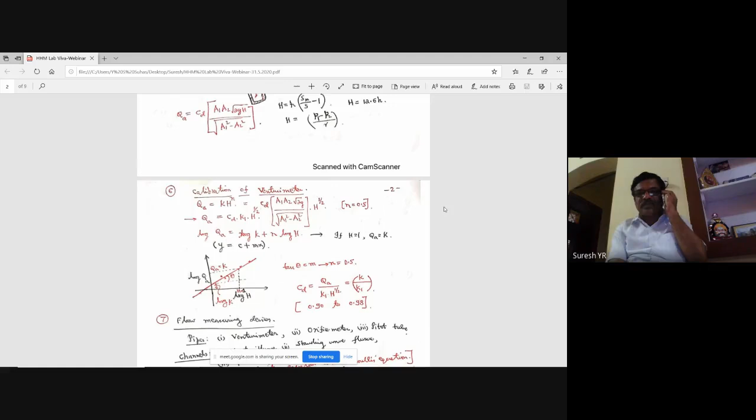I think HOD sir has actually spoken to the students. Okay. Students, now we will be having Suresh sir taking over the screen. I'll join at the end, okay, because of some technical issue there's one-way communication, so please be silent. Yes sir, thank you sir. Thank you sir. Suresh sir, you can start sir.

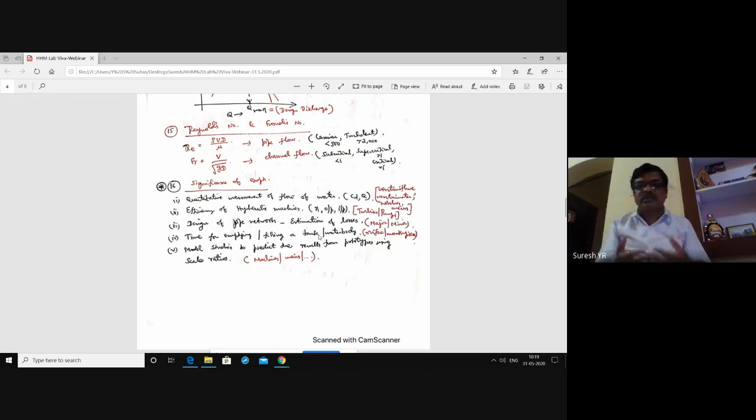Next, model studies. As I already told, to predict the results from the prototypes, we need to have all these model studies. Whatever experiments you are going to conduct in the lab, they are all model studies, because prototypes are all very big. Weir, notch, turbines, pumps, they are all huge in size. The actual structures are prototypes. Since we cannot conduct experiments directly on the prototypes, model studies are considered, using scale ratios. That is very important.

You have learned in model studies about different scale ratios using Reynolds model law and Froude's model law. Mainly those two laws are very important for civil engineers because water is involved. For civil engineers, the main fluid involved is water. We are not worried about gases or other things, which mechanical engineers are worried about. By knowing the results from the model tests, we can always predict the behavior of the prototypes.

So this is how I have given 5 points why this lab is very, very important. You have a lot of points; I am just going to brief it. Now let us discuss one by one. I have made some 24, 25 questions from all the topics. First question, what is a fluid? The difference between a solid and a fluid. You should know about the concept of fluid.

Any substance which can flow is a fluid. That is a very simple definition of a fluid. Solids cannot flow. Solids can only be moved from one point to another point, whereas fluids can flow. That is the basic important difference between a solid and a fluid. That is due to viscosity. A very, very important property of a fluid is viscosity. Other properties will be there for solids also.

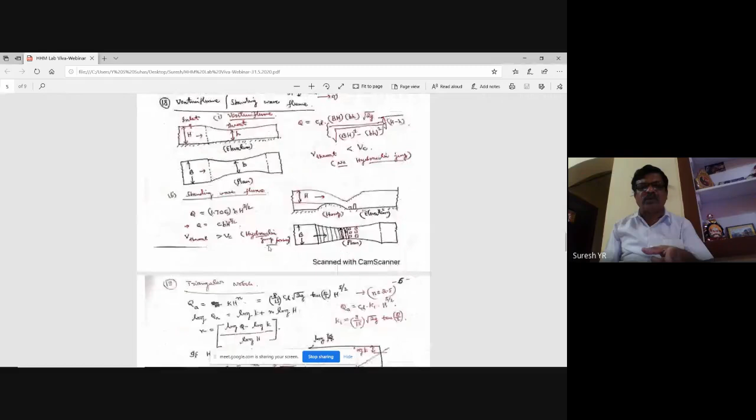Specific weight, gamma, 9810 Newton per meter cube. Then dynamic viscosity of water. Normally the value at 20 degrees centigrade is taken. Some books take 1 into 10 power minus 3, some books take 1.005 into 10 power minus 3. This is in Pascal second. Then kinematic viscosity, almost the same value into 10 power minus 6 meter square per second.

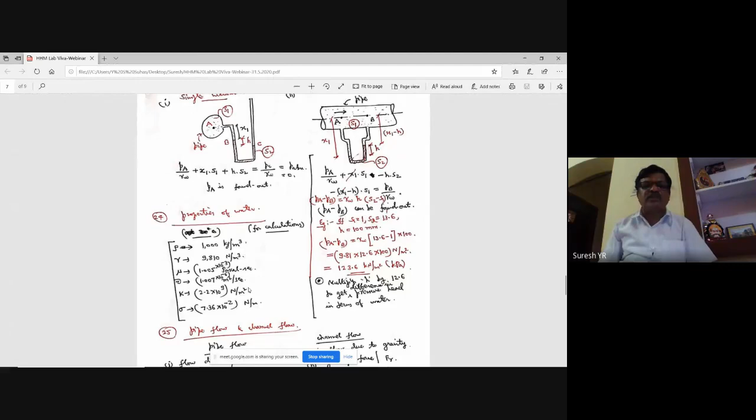Now coming to pressure, a very important concept in fluid mechanics. You have got two types of pressures: gauge pressure and absolute pressure. In question number 2, I am going to tell about that. You have a very important relation, P is equal to gamma H, the hydrostatic law. P is the pressure at any point in a static fluid. Gamma is the specific weight of the fluid. H is the vertical distance of that point from the free surface. That is P is equal to gamma H. This law is called the hydrostatic pressure law.

Using this, you can convert pressure intensity to pressure head. Here, please note that P is pressure intensity. Its unit is Newton per meter square or pascals. Gamma is specific weight, unit is Newton per meter cube. And H is pressure head.

So sometimes pressure is expressed in terms of meters of water, that is called as H. So if you want, H is P by gamma. This I explained in the last class when I told about turbines. Okay, so pressure can be expressed in two ways, one in pascals, another one in meters. So this is the relation.

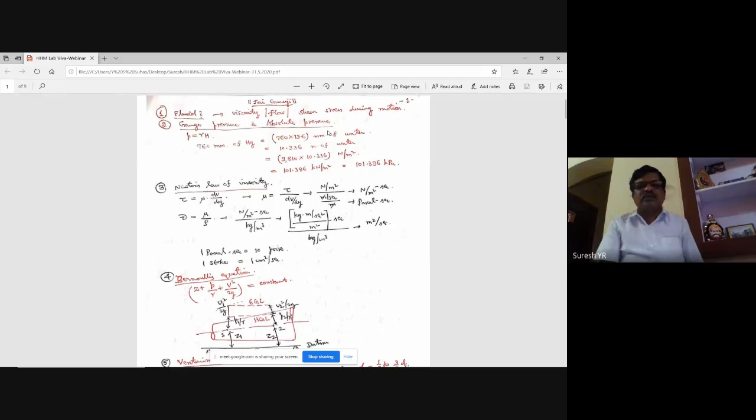Sometimes pressure may be positive, then it is called positive gauge pressure. Sometimes it may be negative, called vacuum pressure or suction pressure. That means if the pressure at a point is less than atmospheric pressure, it is called vacuum pressure. In the case of pumps, the pipe connected to the sump tank is called the suction pipe, because suction pressure, a negative pressure less than atmospheric, is exerted at the bottom of that pipe to suck water from the sump.

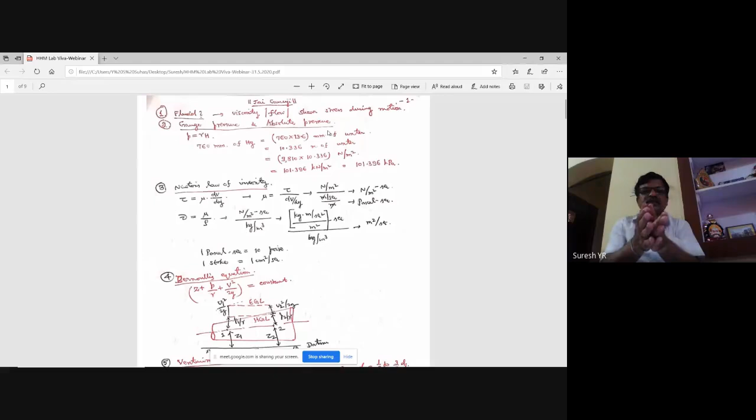Then the impeller will be there, and due to the centrifugal action of the impeller, the water will be forced to the delivery pipe, and then it is collected in the collecting tank or delivery tank. That is the procedure. So why I tell you this is, gauge pressure can be positive or negative. Positive means more than atmospheric pressure. Negative means less than atmospheric pressure.

Absolute pressure means it is referred with respect to zero as the datum. Absolute zero or complete vacuum is taken as the datum. So absolute pressure is always positive; it cannot be negative. That means pressure at a point can be negative gauge pressure or vacuum pressure, but the absolute pressure at that point is always positive, because it is measured with absolute zero as datum.

But one thing, keep in mind, whatever pressure we measure in the laboratory experiments, they are all gauge pressures. So please note that whether you are using a piezometer or a manometer, they are all gauge pressures.

Okay, so that's what I wanted to tell you. Next, very, very important. So in the case of fluid mechanics, we have three fundamental laws. So question number 8, basic laws of fluid mechanics. There are three important basic laws. One is law of conservation of mass, law of conservation of energy, law of conservation of momentum. So these three are the basic laws of fluid mechanics.

Very, very important. So using that law of conservation of mass, you can derive the continuity equation. So the one-dimensional continuity equation you have derived: Q is equal to A into V. Discharge is equal to area of flow multiplied by the velocity of flow. So that is the continuity equation.

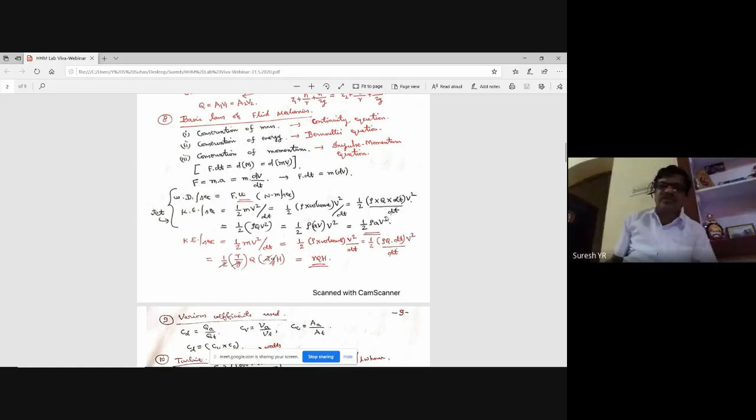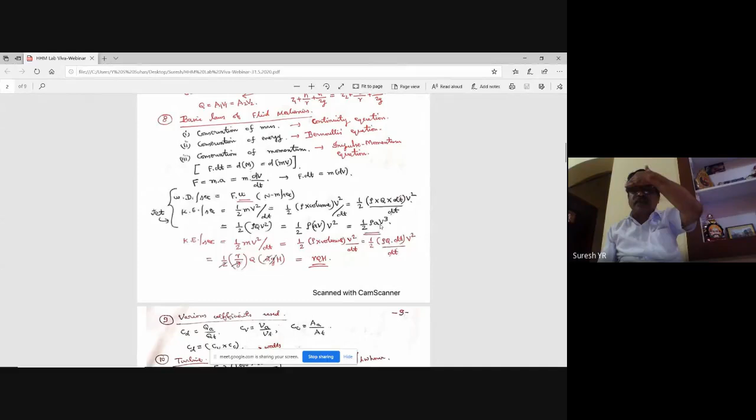So whenever we are finding efficiency of jet, this is your input. Whether it is a stationary vane or a moving vane, this is the input or the kinetic energy. But in the case of fixed vane, your output will be 0 because U will be 0. Vane will not be moving, so output will be 0. But in the case of moving vane, in the case of turbines and pumps, everything, so there, this is your kinetic energy per second, and this will be your work done per second. So the ratio of these two gives the efficiency. This is output, this is input.

Now in another form, I told on that day, whenever you are using a turbine, your gamma QH or kinetic energy is the input. So you can have like this also. Half mv square by dt, once again it is rho into volume, dt will get cancelled. This half will remain as it is. This rho can be written as gamma by g, because gamma is equal to rho into g, into Q, into this v square can be written as 2gh, because we know that v is equal to root 2gh. If you use Bernoulli's equation, neglecting losses, v square will be 2gh. So if you cancel out all this, you'll get gamma QH.

See how it can be derived. So we are going to use it directly as input in the formula. How we got it? This is the expression. Here gamma is the specific weight of water, 9,810. Q is the discharge in meter cube per second. H is the pressure head at the entrance of the turbine, which is measured using that pressure gauge in meters. So if you know this, then you can compute the input.

Why I told this is, these three are very, very important principles in fluid mechanics. Based on conservation of mass, continuity equation is derived. Based on energy conservation, Bernoulli's equation is derived. Based on momentum conservation, impulse momentum equation is derived. So these are the basic fundamental laws of fluid mechanics, which are used in one or the other experiments. So this is the Bernoulli's equation. This is what I explained there.

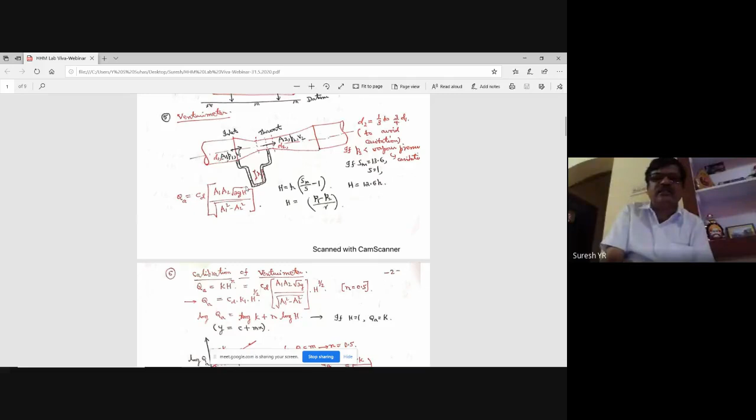Of course, if you connect the two sections to a U-tube manometer, definitely you will know at what point pressure is more. Actually, pressure is more at the inlet section. You can see here. Whatever liquid is there, it exerts more pressure at the inlet section. Therefore, it has gone down. So the difference in pressure is nothing but H. That value is H here.

Now, why is the pressure more at inlet? Why is the pressure less at throat? Why is the difference there? In the case of a Venturi-meter, the diameter is gradually reduced here. So this portion is called the converging cone. This is the throat section. This is the diverging cone. You have the values for the inclination and length, all those things, available in your manual.

So here, since the diameter is more, area at inlet will be more. When area is more, velocity is less. Please keep that in mind. When area of flow is more, velocity is less because discharge is constant. Q is equal to A into V. So when area is more, V should be less. So velocity is less here. When velocity is less, pressure should be more. Why? Because of Bernoulli's equation. This total is constant.

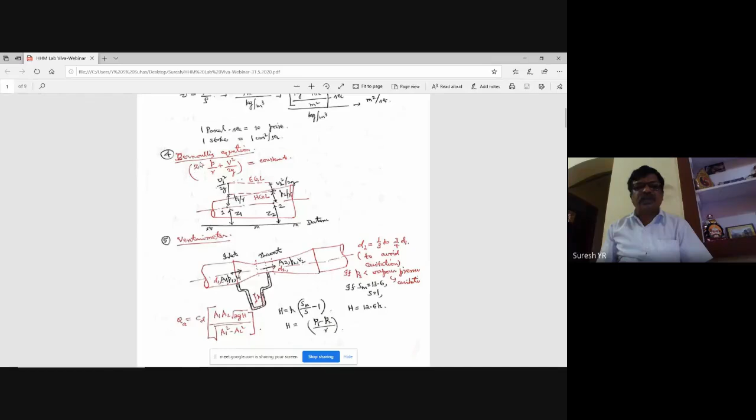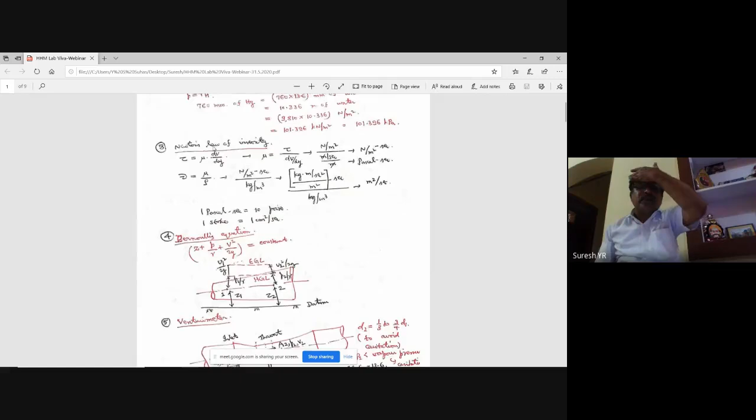When this total is constant, in the case of a horizontal Venturi-meter, Z1 and Z2 will be equal. You can cancel them out. So you will have P1 by gamma plus V1 square by 2g is equal to P2 by gamma plus V2 square by 2g. If you use that equation, if V1 is less, P1 should be more. So that is the concept. Velocity and pressure are inversely proportional here. That's why pressure is more here and less here.

And this is the equation we are going to use to compute the actual discharge in the case of a Venturi-meter. A1, A2 are the areas at inlet and throat section. H is called the Venturi head, which is given by this equation: h into Sm by S minus 1. Sm means specific gravity of the manometric liquid. Normally, mercury is used, so Sm will be 13.6, and S will be the specific gravity of the fluid flowing through the pipe. Normally it is water, so it is 1.

If you apply this equation, Sm is 13.6, S is 1. So 13.6 minus 1, 12.6 times h. That is why we multiply that value by 12.6. Whatever difference is there in the manometer reading should be multiplied by 12.6 to get the Venturi head H. Once you get that H value, by knowing the diameter, you can compute the area by pi d square by 4. So A1, A2 can be found out, and you can calculate the discharge.

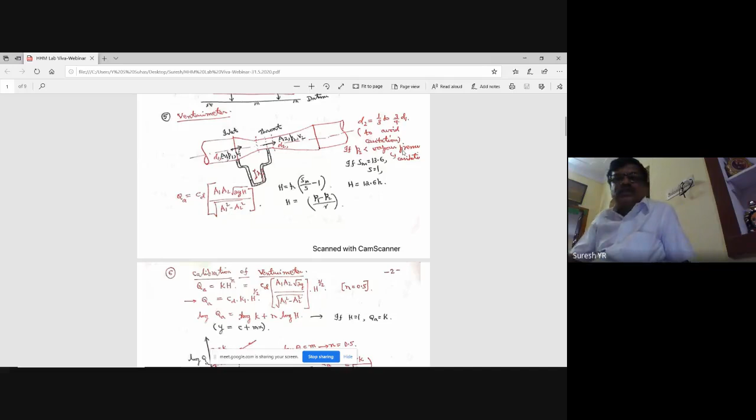Due to that, your discharge capacity will reduce and the efficiency of the machine will reduce. So the CD value will get reduced. To avoid all those things, we have to have a throat diameter between 1/3 to 3/4 times D1. Normally we take 50%, so D2 is taken as half of D1. So it lies in between these two.

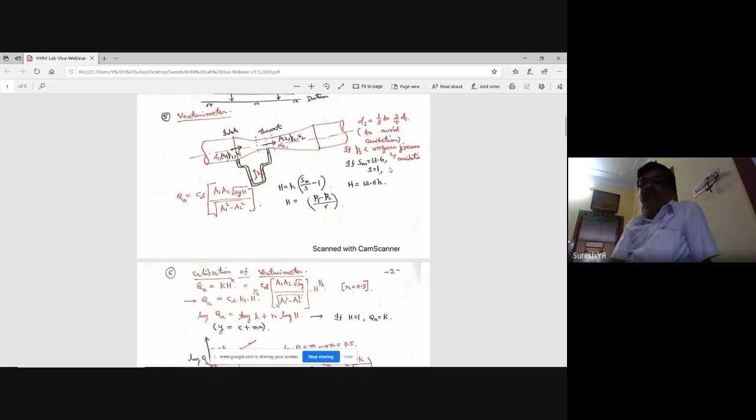1/3 means 0.33, 3/4 means 0.75, so we normally take 0.5. That's what you can observe in your laboratory: the ratio of the diameter of the throat and inlet. So that is the reason. Cavitation we have to avoid in any machine because it affects the efficiency of the machine, or when you calculate these coefficients you will get very, very low values.

Normally in the case of a venturimeter, the CD value lies between 0.9 and 0.98, so losses are less. When the value of the coefficient approaches 1, more than 0.9, we can say that losses are very, very less. Such instruments are used more because we can have more efficiency and more discharge can be obtained. If the CD value is very high, like 0.98 or 0.99, it means your actual discharge is almost equal to the theoretical discharge.

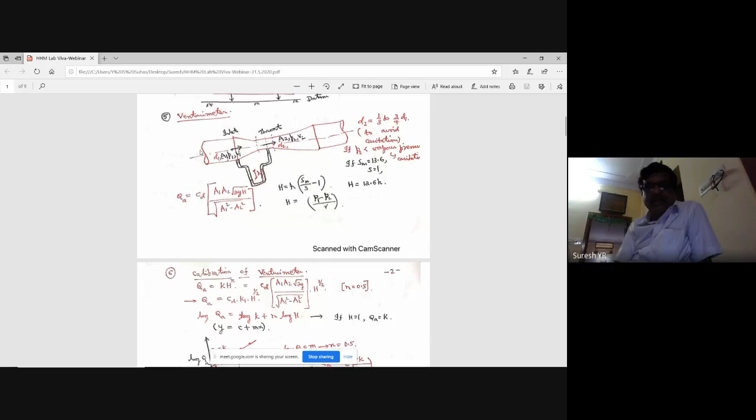So this is the concept of the venturimeter, which works based on Bernoulli's theorem and the continuity equation. Calibration of the venturimeter we have done in the laboratory. Let me explain that experiment. Normally, the discharge equation is written like this. This is the discharge equation in the case of a venturimeter. This entire thing, except h to the power half, including CD, can be taken as constant, so I have taken it as K.

So you can write the equation like this: Q actual is equal to K into h power n, where n is half, 0.5. Suppose you want to find the CD value: if you take only the term A1 A2 root 2g divided by root of A1 square minus A2 square, I will take it as K1. So Q is CD into K1 into h to the power of half.

Now, consider this equation. Take logarithm on both sides: log QA is equal to log K plus n log h. This is the straight line equation form, y is equal to mx plus c. If you compare these two, log QA is y, log K is c, m is n, and log h is x. So y equals mx plus c represents a straight line with slope m and y-intercept c.

So take the readings in the laboratory, actual discharge reading and H reading. The H reading is obtained, as I told you, as capital H equals 12.6 times small h, and plot it on a logarithmic scale. Why do we have to use a logarithmic scale? Because the range of values of H and Q is very high. When the range of your readings is very high, you have to go for a logarithmic scale.

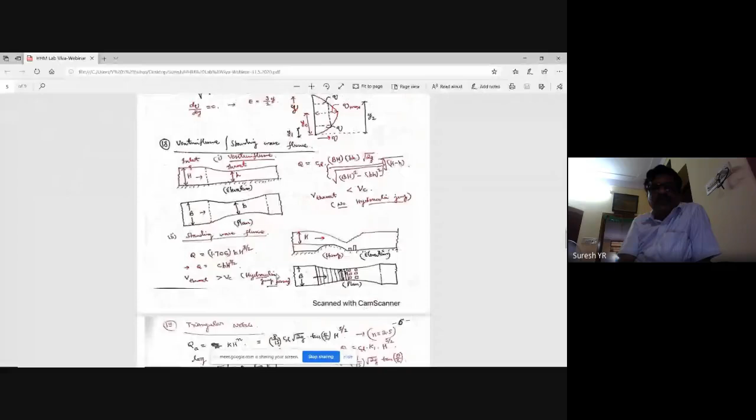In the case of V notch, this is the triangular notch. In the case of triangular notch, same equation. So here also h to the power of 5 by 2 will be there. So n is equal to 2.5. We have to join the points by a best fit line of slope 2.5. And the same procedure is followed here also. K by K1 gives the value.

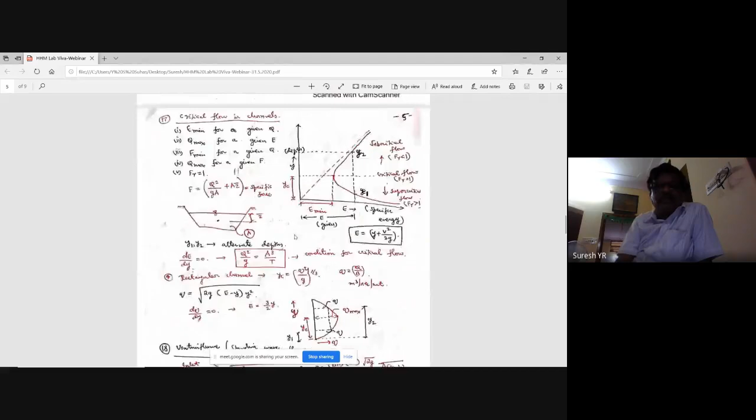Here the value of CD lies between 0.6 to 0.65 in the case of triangular notch. In notches, losses are more. That's why you are going to get a lower value of CD. If the CD value is less, it means losses are more. Now this is about the venturimeter concept.

Now question number 7, flow measuring devices. What are the different flow measuring devices in your laboratory? These are the flow measuring devices: venturimeter, orifice meter, pitot tube. Pitot tube may not be used in the laboratory. In pipes, if you want to measure the flow, these are the instruments used. In channels, these are the instruments: venturi flume, notches, weirs, standing wave flume, all those things.

All the discharge equations derived for all these devices are based on the continuity equation, which is this, and Bernoulli's equation, which is this. So the combination of these two will give the equation for discharge for all these devices.

Okay. So next, coming to what are the various coefficients? As already told, a coefficient means the ratio of actual to theoretical. So keep that in mind. Actual to theoretical is the coefficient. In your laboratory, you are using mainly three coefficients: CD, CV, CC.

Mainly in the case of the orifice, vertical orifice experiment, we need to calculate these three coefficients. What is CD? As already told, it is the ratio of actual discharge to theoretical discharge. Please make a note that actual discharge is always measured in the laboratory using a collecting tank, whereas theoretical discharge is calculated using a formula, which is derived from the basic concepts of laws of mechanics. So if you take the actual divided by theoretical ratio, it is called a coefficient.

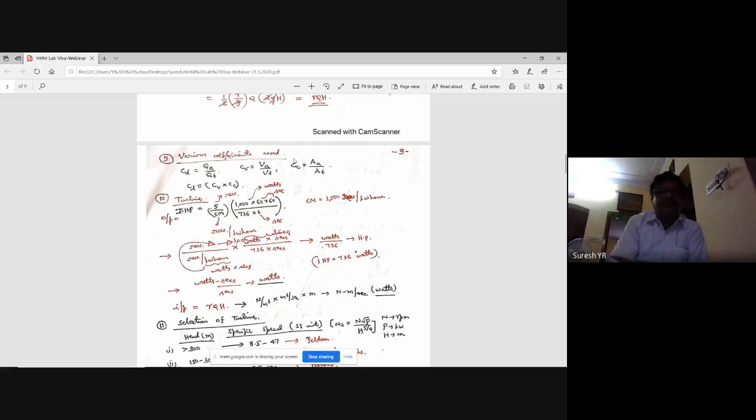Now, the next point is coming to the 10th question, turbine. This thing I explained last week, but I saw in the manual, this is the equation given for calculating the output of the turbine. In the Kaplan turbine, this is the output. We take the energy meter reading for computing output, because in the case of a turbine, hydraulic energy gets converted to electrical energy. So here gamma QH is the input, kinetic energy of the jet, that is input.

I explained just now how to get this, starting from the half mv square kinetic energy expression, how you got this gamma QH. So gamma is in Newton per meter cube, Q is in meter cube per second, H is in meters. If you multiply these three, you'll be getting Newton meter per second. That is nothing but your watts. Now this is input. Now for output, you have used this equation in the manual. How you arrived at this equation, you should keep in mind.

Here in the reading, we are going to take the time for 5 revolutions of the energy meter disk. So output is measured by noting down the energy meter disk reading. In the case of the turbine, this becomes the output. In the case of the pump, this becomes the input, and this becomes the output. That is the reverse in the case of the pump.

So 5 is the number of revolutions of the energy meter disk. EM is the energy meter constant. In your manual, I think it is given as 1500 revolutions per kilowatt hour. That is the unit for the energy meter constant. The meaning of that is, if you apply 1 kilowatt hour, you can have 1500 revolutions of the disk. Now, here for 5 revolutions, the corresponding energy meter constant is taken.

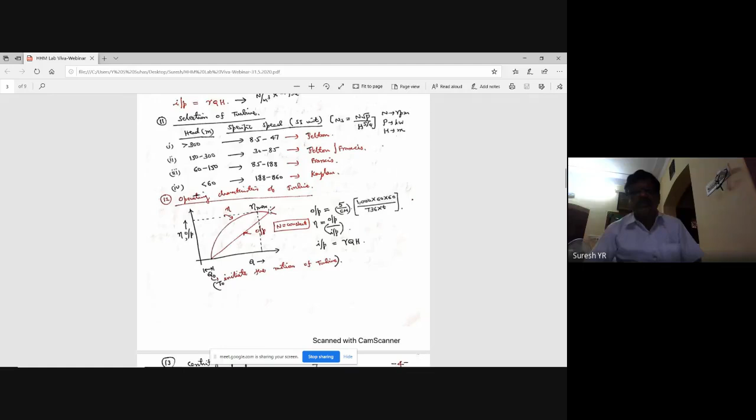Now, one important characteristic curve of the turbine you should understand is the operating characteristics. Operating characteristics means the speed of the turbine is kept constant. We conduct the experiment at constant speed and plot the characteristics, mainly output and efficiency versus discharge. The efficiency curve increases, then it reduces, so there will be some peak value. That is the point of maximum efficiency.

Similarly, output also increases. But initially you should have some minimum discharge to start the motion of the runner of the turbine. That is your Q0. So it won't start from here, it will start from here. Here output is given by this, just now I explained how to get this. Input is given by this, and the ratio is your efficiency.

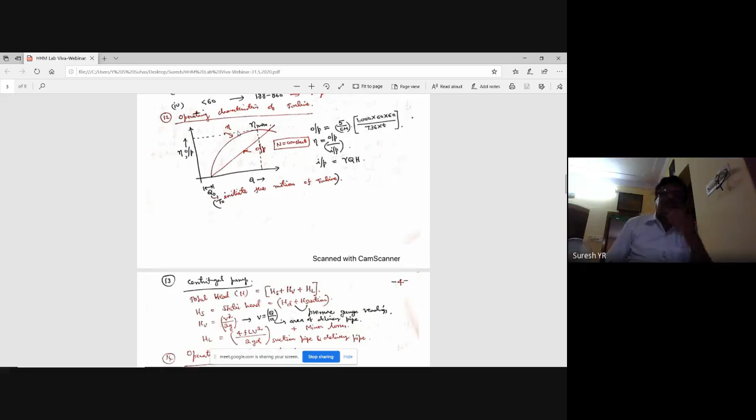This is a very important experiment where the maximum efficiency of the turbine is obtained, and normally this value of Q is taken. That is called the design discharge. The design discharge for the turbine is the discharge at which maximum efficiency can be obtained. Even in the case of pumps, it's the same thing. This graph you will be drawing in the operating characteristics or performance characteristics of the turbine.

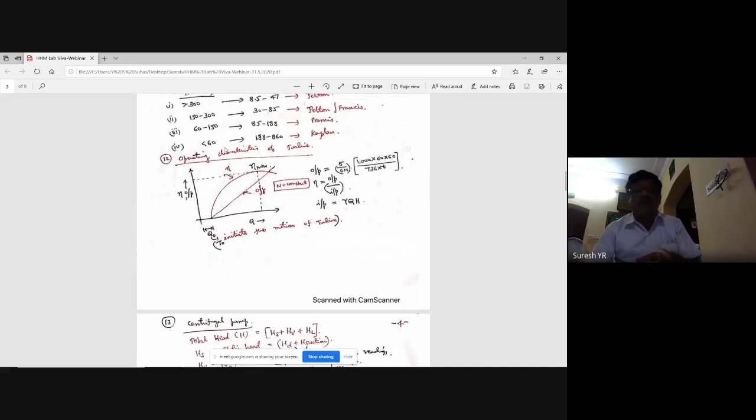Main characteristics means you have to take H constant. If you take head constant and conduct the experiment, they are called the main characteristics of the turbine. It has been very neatly explained in your manual. You can follow that. I just want to tell you the importance of this efficiency, eta max.

Now coming to pumps, the main thing you should keep in mind is what you mean by total head acting on a pump. The total head acting on a pump consists of three parts: HS, HV, HL. HS is called the static head. Static head is nothing but the sum of the readings you get in the suction pipe and delivery pipe, that is, the total of the readings from the suction pressure gauge and delivery pressure gauge.

And you have the velocity head or kinetic head, V square by 2g, HV, where V is the velocity in the delivery pipe. How to get the velocity in the delivery pipe? That is the discharge measured in the collecting tank divided by the area of the delivery pipe, A. So V square by 2g is your HV.

Add these two. In addition to that, you'll have frictional losses. Normally, only the major loss is considered: 4fLV square by 2gD, where f is the coefficient of friction. If you want to consider minor losses also, expansion, contraction, bend, if they are there, you should have the corresponding loss coefficient values.

You can add those values also for minor losses. So 4fLV²/2gD, you see, is calculated for both the suction pipe as well as the delivery pipe. For velocity, you have to take the corresponding velocity in the suction pipe and the corresponding velocity in the delivery pipe. For that, Q/A is the formula for finding velocities. L is the length of the pipe; suction pipe and delivery pipe you have to take separately.

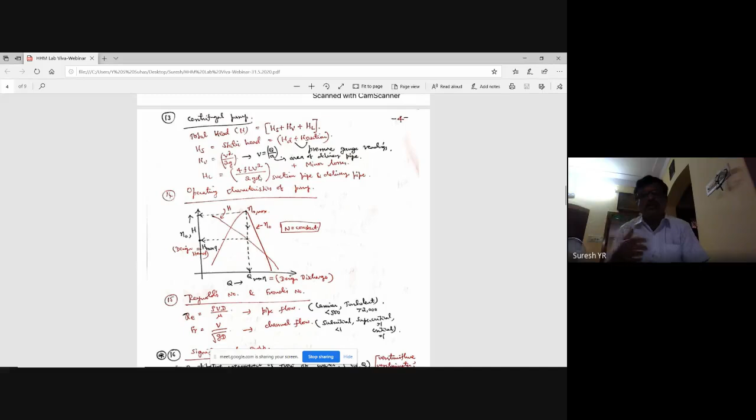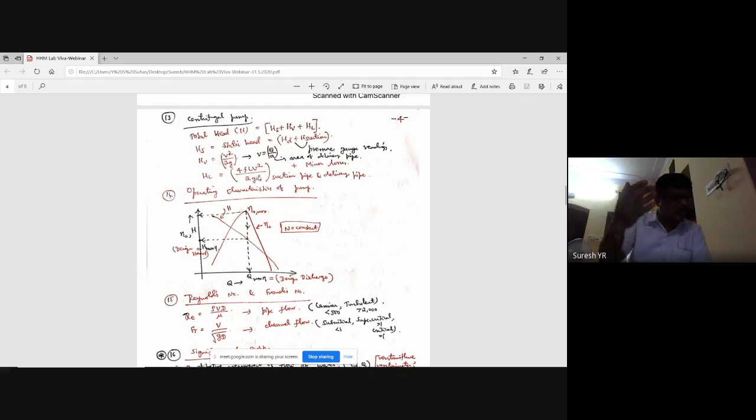Q you can measure in the collecting tank. H is obtained by adding these three. Then gamma you will know, 9,810 newtons per meter cube for water. If you multiply all three, gamma QH, you get the value of output in watts. Input you can measure using the energy meter reading, as I already explained in the case of the turbine. Then take the ratio.

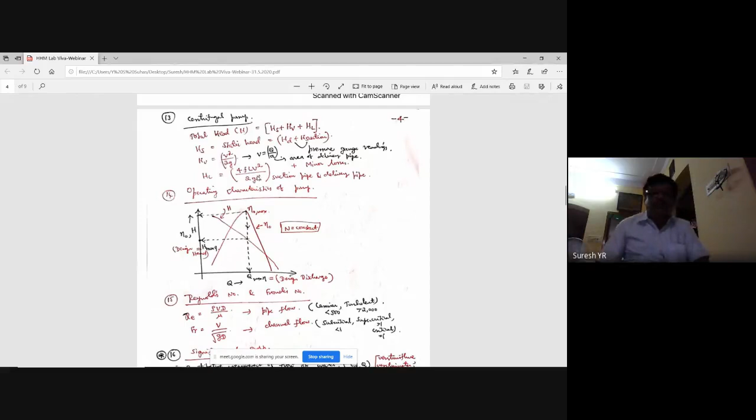Now if you plot the operating characteristics of a pump, you will get something like this. One important difference between turbine and pump lies here. In the case of a pump, you can see efficiency increases, then drastically reduces, whereas here it is not much. See the efficiency curve. Another very important graph in a pump is head versus discharge. You can observe it's a curve, not a straight line. Your head decreases with the discharge.

Head decreases with discharge. Why this graph is very important is, once again, here also we have to compute the maximum efficiency. Eta O means overall efficiency; it takes into account all the losses. At this point, overall efficiency is maximum. Draw an ordinate at that point to cut the x-axis, which measures discharge. Y-axis is H and eta, x-axis is discharge. The discharge at the point where maximum efficiency occurs is called the design discharge. So the design discharge of a pump is the discharge at maximum efficiency.

Similarly, we have the design head. What is design head? Wherever this line cuts the H versus Q graph, at that point you draw a horizontal line. It cuts the H axis somewhere here. That value of H is your design head.

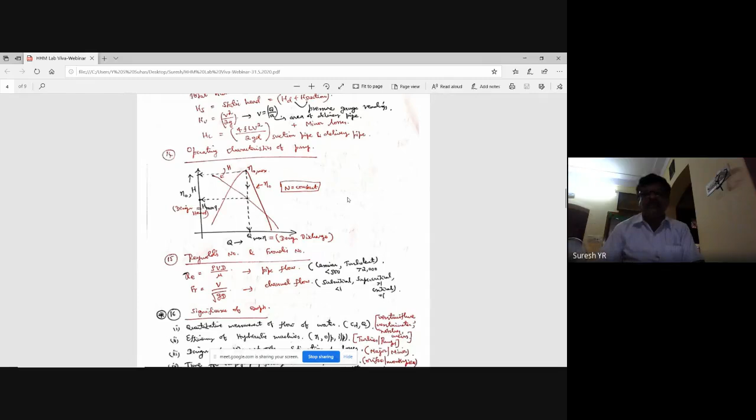Now we'll come to another important concept, Reynolds number and Froude number. Very important. You should know the difference. What is Reynolds number, where is it used? What is Froude number? There are many dimensionless numbers in hydraulics: Mach number, Weber number, Euler number. But mainly we are going to use these two.

Reynolds number is the ratio of inertia force to viscous force. That is the definition. Whenever fluid is flowing, it has some inertia force, mass into acceleration. Mass into acceleration is inertia force. Divided by viscous force, which is shear stress multiplied by area. If you take that ratio, inertia force to viscous force, and simplify, you get an expression like this, ρVD/μ.

In the case of pipe flow, what is ρVD/μ? ρ is the specific mass of the liquid. Normally we take water, so ρ is 1000 kg per meter cube. Velocity can be found by knowing the discharge: Q divided by area of the pipe gives the velocity. D is the diameter of the pipe.

Mu is the dynamic viscosity of water, which I have given. At the end, I have given 1.005 × 10^-3. That is the value in SI units. That value you have to take if you substitute in this. So V should be in meter per second, rho should be in kg per meter cube, D should be in meters, mu should be in Pascal second.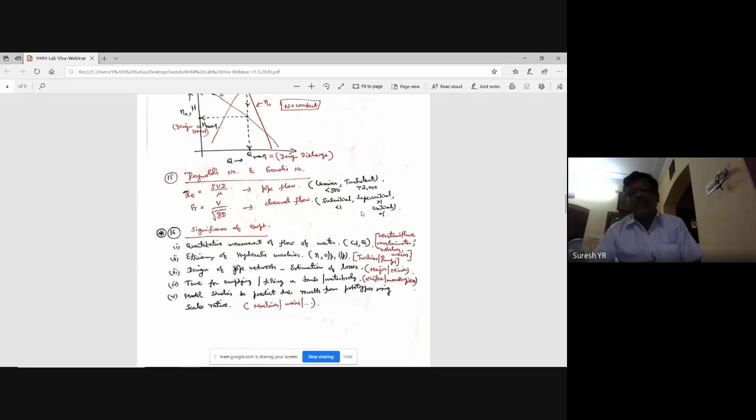Now, this is critical flow in channels. You have studied this in your applied hydraulics. I only wanted to tell you what the conditions for critical flow in a channel are. Very important concept, critical flow. There are so many advantages of critical flow. So these are the properties, characteristics of critical flow. Suppose you know the discharge. For a given discharge, specific energy will be minimum.

What is specific energy? E. E is Y plus V²/2g. I am talking about open channel flows now. Y is the depth of flow, V is the velocity of flow. So if you want the specific energy at a particular section of a channel flow, Y plus V²/2g is the formula. That means it is the energy referred with respect to the channel bottom itself as datum. Actually, this is nothing but your total energy. Z won't come into picture here because the channel bottom itself is taken as datum, Z will be 0.

So Y plus V square by 2G, that is the specific energy. So this energy, if it is minimum for a given Q, then it is critical flow. Discharge is maximum for a given E. For a given specific energy, if the discharge is maximum, we can say that it has attained critical flow condition.

And specific force concept: specific force is given by this expression, Q square by gA plus A Z bar. I have taken an example of trapezoidal channel here. A is the area of flow, Z bar is the distance of centroid from the free surface. Q is the discharge, capital A is the area of flow. So if you use this expression, you are going to get what is called as specific force.

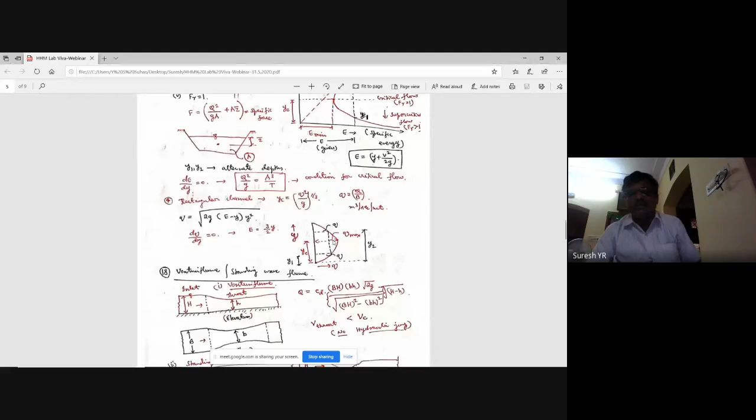Another graph you should remember is this. If you plot depth versus discharge, so discharge is plotted. Discharge means discharge per unit width, small q, not capital Q. So small q is capital Q divided by B. So if you plot the graph, you are going to get a curve something like this.

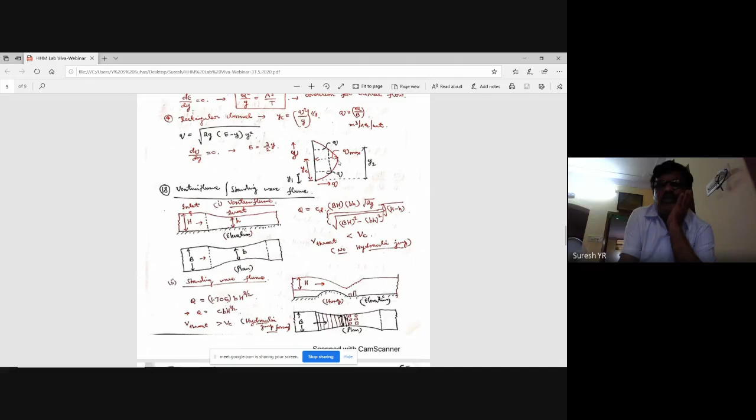You can observe that at some point here, q is maximum, then it reduces. So this point where q is maximum is the point of critical flow. That means the depth of flow corresponding to that will be YC. That is what this equation gives. Okay, so this is what I wanted to explain in the case of critical flow condition.

Then coming to Venturi flume and standing wave flume, this is another experiment which is used to measure discharge in channels. I think only the Venturi flume may be there for you, standing wave flume may not be there. Anyway, I'll just briefly explain what that is. You might have studied it in your theory class also. So the Venturi flume consists of an inlet portion; this is the channel. It's a small channel provided in a laboratory.

Inlet section is this, throat section is this. At the throat section, your width is reduced. This is in plan, this is in elevation. Small b is the width of throat, capital B is the width at inlet, the width of the channel itself. This is the throat section. Because of this reduction in the throat width, you will be having afflux. Afflux means there will be a change in the depth of flow, capital H minus small h.

So here the depth of flow is h at the throat section. Capital H is at the inlet section. You can measure this using gauges, hook gauge or point gauge, to measure capital H and small h. So just by measuring the depth of flow, you can compute the discharge. That is the advantage here in the case of channels by using a Venturi flume.

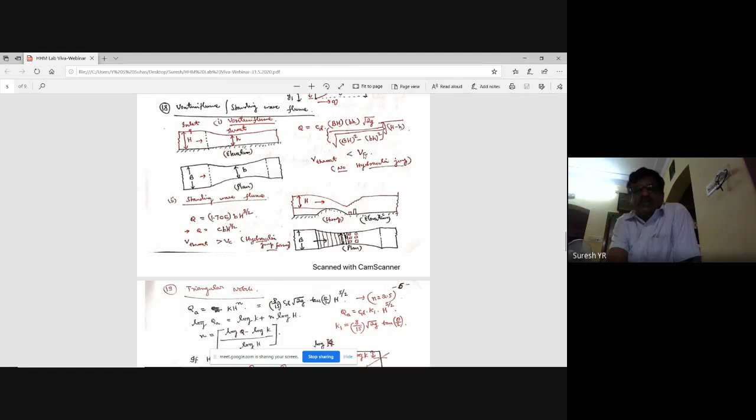One thing is here, the velocity at the throat is so designed that it is less than critical velocity. Critical velocity means the velocity of flow at critical depth of flow. So VC is the velocity of flow when the flow is critical. Okay, so velocity at the throat is less than VC in the case of the Venturi flume, so that there will not be any formation of hydraulic jump. Hydraulic jump will form only if V at throat is greater than VC. That happens in the case of standing wave flume. That is the difference between these two.

So this is the equation used to find discharge in standing wave flume. In standing wave flume, only this B and H you have to measure. There will be a hump provided here. In addition to the reduction in the width of the channel, a hump is provided here, just to have hydraulic jump formation here. You can see here, this is the formation of hydraulic jump.

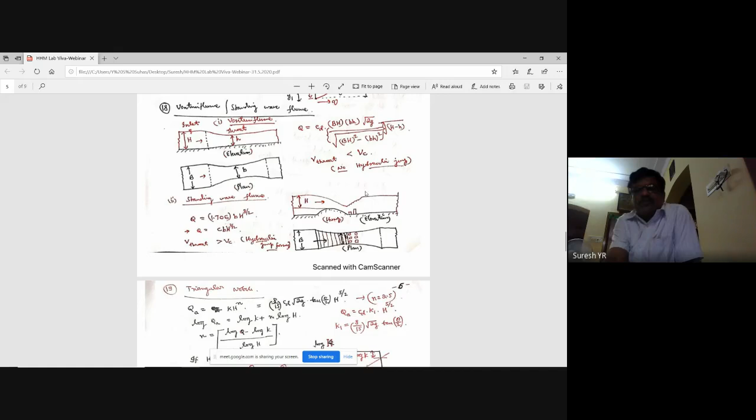Because the velocity at throat is designed in such a way that it is greater than critical velocity, a hydraulic jump will form here. Due to that hydraulic jump, there will be some loss of energy, and you can compute the discharge by just measuring this H and B. So you can see here, the discharge equation consists of only this H and B.

Of course, I don't know whether you have got this experiment in your lab or not, but I wanted to tell you the difference between these two flumes. Both the flumes are used to measure the discharge in channels. In Venturi flume, no hydraulic jump formation. In standing wave flume, hydraulic jump formation is there.

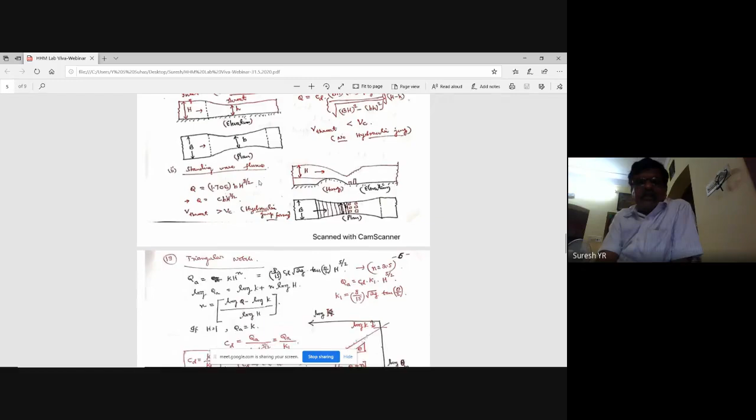Now coming to triangular notch, of course, this I have explained when I explained about the Venturi meter and this V notch experiments. We have to draw the graphs, log graph, okay.

Cipolletti notch: it is a special type of trapezoidal notch in which the side slope is 4 vertical to 1 horizontal, or this angle theta by 2. Actually, this is theta by 2, this is theta by 2. If you add that, you will get theta. So this theta by 2 is 14 degrees. 14, I have not written here. Anyway, theta by 2 is 14 degrees, or tan theta by 2 is 1 by 4. This is the ratio.

Why has this Cipolletti notch got a special property? Why have they provided 1:4 like that? Because if you want to calculate the discharge using a Cipolletti notch, it is more accurate. The difference between rectangular notch and Cipolletti notch is end contraction. What do you mean by end contraction? Whenever flow occurs over a notch, the water sheet will flow like this. Initially the channel will have some width, then later that width will reduce towards the notch. You might have observed in the laboratory.

So L is the length of the notch here, but the channel width is something like B. So L is less than B. When there is a contraction in the width of flow, there will not be flow at the corners. So water flows like this, contracted at the edges, at the ends. That is called end contraction. Here and here it will be there. There will be two end contractions.

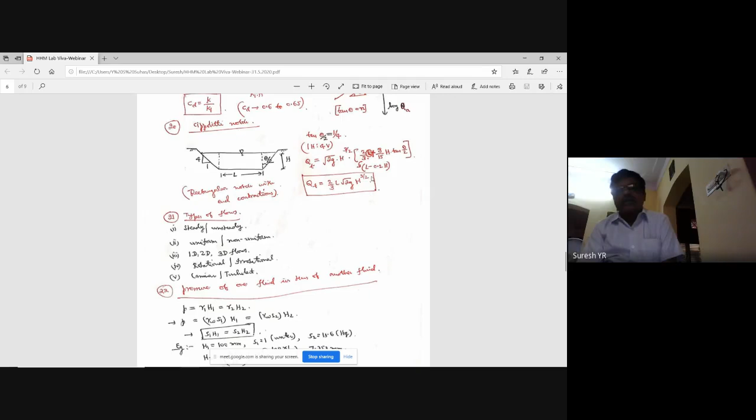This is nothing but discharge over a rectangular notch without end contraction. That means 2/3 L into root 2g h to the power of 3/2. Cipolletti is the name of the person who derived this special type of notch. If you use this formula, directly you can get the theoretical discharge. You need not go for the trapezoidal notch equation; the rectangular notch equation itself will give the discharge over a Cipolletti notch. That is why this has been introduced.

You can just try this. Simple calculation is there. If you simplify this, you will get this, and compare this with your rectangular notch discharge equation. They are the same. So this is about a special type of notch.

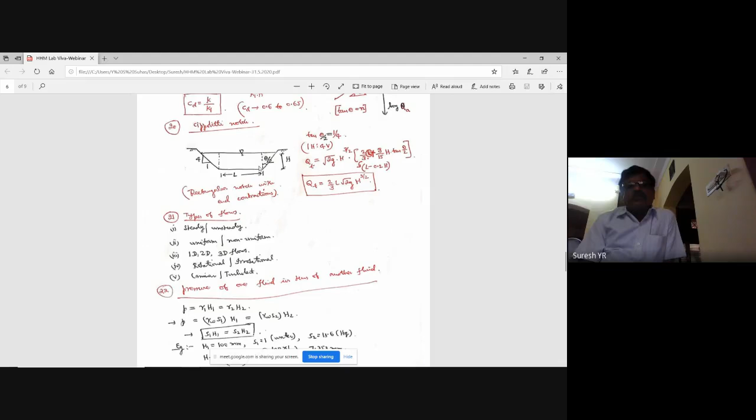So in your laboratory, you are going to do types of flows. Types of flows you have studied in your fluid mechanics, kinematics, fundamentals of fluid flow. You have different types of flows.

In viva, normally they will ask these questions: types of flows, steady flow and unsteady flow. So what do you mean by steady and unsteady? See these flow parameters. What are the different flow parameters? Velocity, pressure, density, acceleration. They are all called flow parameters.

So if the flow properties or parameters don't change with respect to time at a particular section, then we call it steady flow. Steady corresponds to properties that won't change with respect to time. Unsteady means if it changes with respect to time. That is why in the laboratory we wait for some time. For taking readings, the flow should be steady. It should not vary.

Suppose you are taking a reading in a V notch, the head reading, depth of flow over that notch, using a point gauge or hook gauge. We have to wait for some time, not immediately, because the head will be varying. There will be some disturbance in the flow. Once it attains steady flow, once the head won't change with respect to time, at that time you have to take the reading. You have to wait for some time.

So all the readings you have to take when the flow is steady in the laboratory, whether it is a pipe major loss experiment, venturimeter experiment, V notch or rectangular notch. Even in the case of orifices, when the head becomes steady, only then you take the X and Y readings, the horizontal scale and vertical scale readings. So attaining steady flow is very important for taking readings.

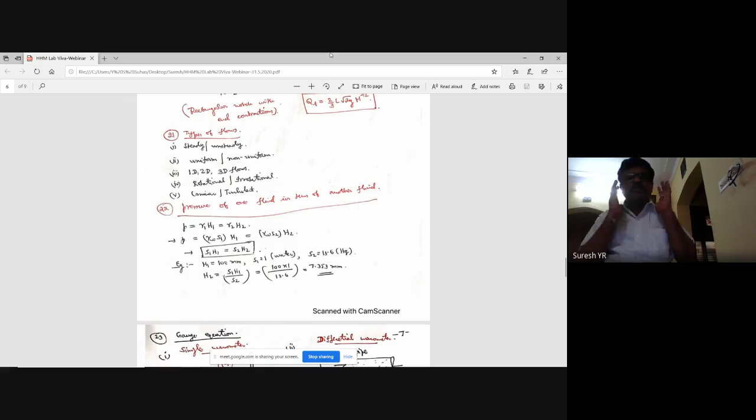For example, take a prismatic pipe. The diameter of the pipe remains the same; it is not a tapering pipe. If it's a prismatic pipe having the same diameter from one end to the other, you can take the flow as uniform flow. Uniform flow means velocity remains the same at different sections of the flow, assuming no losses. If some frictional loss is there, we have to account for that. Otherwise, you can take it as uniform flow. So if the fluid properties, mainly velocity, won't change with respect to the length of flow, it is called uniform flow.

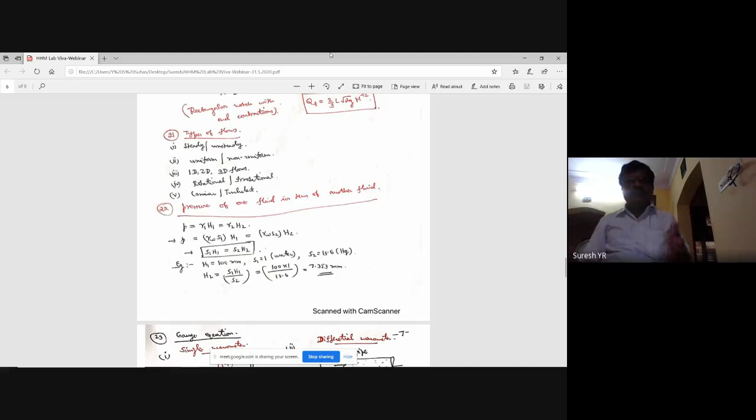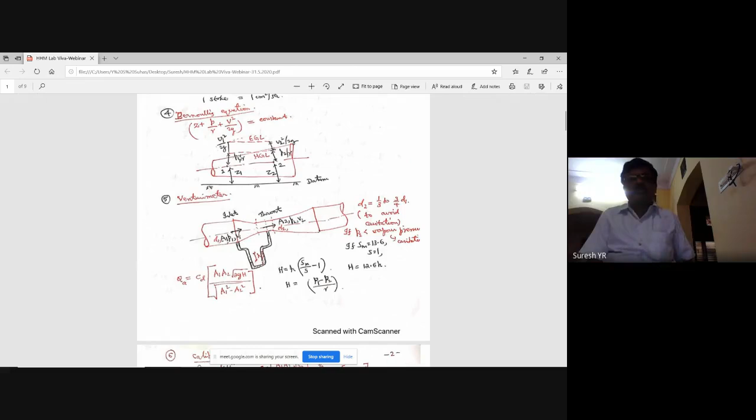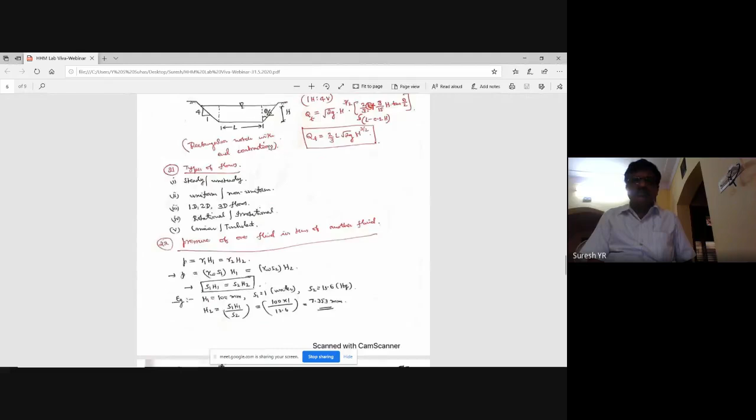Otherwise, if it changes, as in the case of a tapering pipe, velocity changes. I have given an example when I explained Bernoulli's principle. I have shown a tapering pipe here. The diameter varies, and V1 and V2 are different. That means it is a non-uniform flow. So if the fluid properties won't vary with respect to distance, length of flow, it is uniform. If it varies, it is non-uniform. The best example of non-uniform flow is flow in a tapering pipe.

Then one-dimensional, two-dimensional, three-dimensional flow. This is another type of flow. This is based on the fluid property; I will take only velocity, let us say. If the velocity is a function of all three coordinates, x, y, z of the point of flow, that means V is a function of x, y, z.

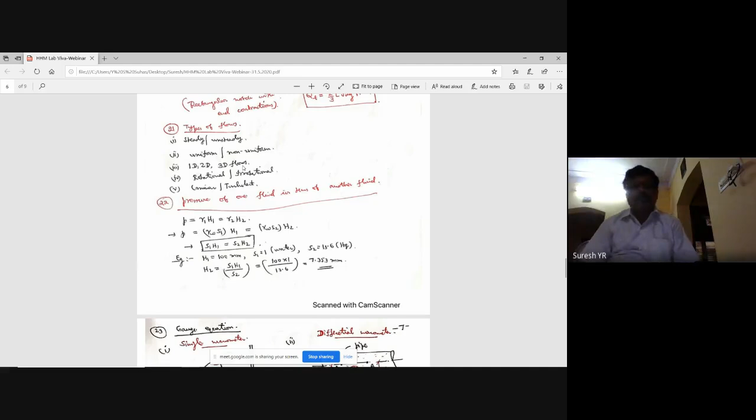In the fundamentals of fluid flow, we assign coordinates to the point just for the analysis, to find the velocity and the acceleration. That becomes a part of kinematics of flow. Finding the energy and all those things becomes part of dynamics of flow, where we use Bernoulli's equation. In kinematics of flow, we are not using Bernoulli's equation; only velocity, acceleration, and the path traced by the fluid interest us.

That is important. So if velocity is a function of all three x, y, z coordinates of the point of flow, it is a three-dimensional flow. If it is a function of only x and y, that means it won't vary in the third direction z, then it is a two-dimensional flow.

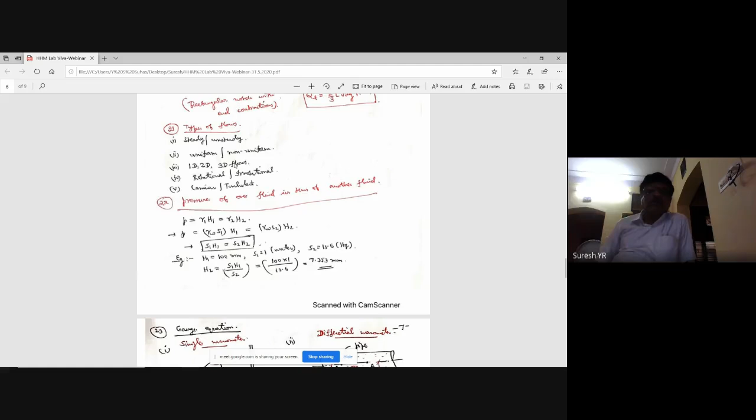If it varies only in one direction, that is only in X direction, if V is a function of only X, f of X, then it is one-dimensional flow. Normally the analysis of three-dimensional flow is very complex, very complicated. So what we do is we transform the three-dimensional flow analysis to two-dimensional flow analysis. So instead of taking X, Y, Z, all the three, we will convert into only X and Y, and we are going to analyze. That is possible.

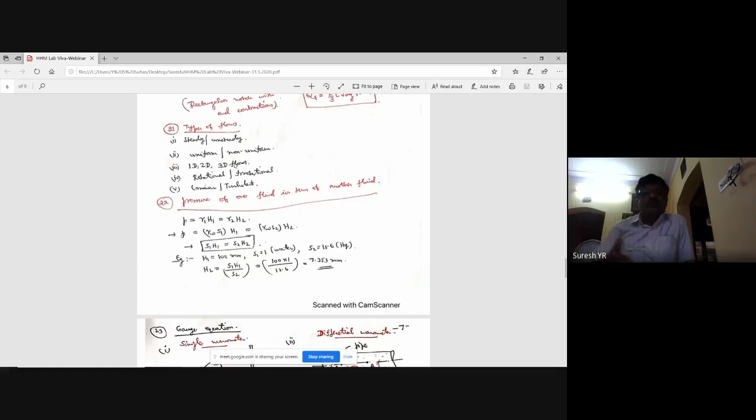Simulation of flows is possible in a software, and theoretical background is also there. So anyway, you have studied only 1D and 2D flows in your hydraulics. So you concentrate only on that. Only I wanted to tell you that 3D flow means the velocity or pressure, whatever it is, varies with respect to all the three XYZ components.

Then rotational, irrotational flow. Some fluids, when they are flowing in a pipe or channel, start rotating about their mass centers. If the fluid particles start rotating about their mass centers, then it is called rotational flow. Thick oils and real fluids exhibit rotational flow, whereas water, ideal fluids, exhibit irrotational flow. Of course, in your fluid mechanics, since we are dealing with only water, we can take it as irrotational flow.

Then laminar and turbulent, that I explained. Based on the Reynolds number, we can classify flow as laminar and turbulent flow. If the flow takes place in the form of smooth layers or laminae, just like in the case of real fluids, thick oils where viscosity is very high, then it is a laminar flow. If the flow is in a zigzag motion due to eddy formation, then it is a turbulent flow with high velocity. If the Reynolds number is more than 2000 in the case of pipes, it becomes a turbulent flow.

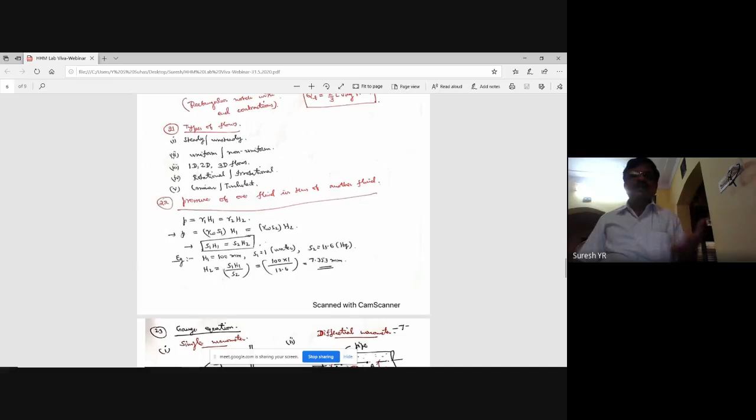Normally we have turbulent flow only in water. So all the experiments you do in the laboratory, you can just check that. Turbulent flow exists in the major loss experiment or venturimeter experiment. If you calculate the Reynolds number, it is more than 2000. That is about turbulent flow. So these are some basic questions they can ask about types of flows.

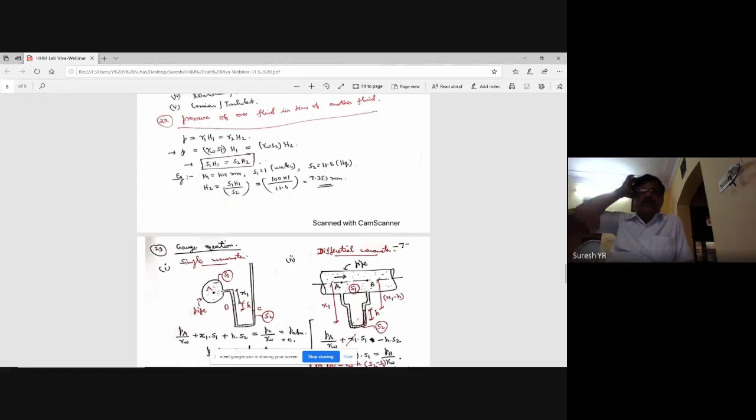Then sometimes in a problem you may have to express the pressure of one fluid in terms of another fluid. For example, they will give the pressure in terms of water and ask you to find the pressure in terms of oil of some specific gravity, or in terms of mercury. So it's very important, the conversion of pressure of one fluid in terms of another fluid. Here I have taken the pressure as P. I have considered two liquids, one is water, another is mercury. S1 is for water, S2 is for mercury, H1 is for water.

So gamma 1 H1. Since I have to express the same pressure in terms of another fluid, it is gamma 2 H2. You will be knowing H1, gamma 1 and gamma 2. You have to find out H2. Now gamma 1 can be written as gamma W into S1, because specific gravity is the ratio of specific weight of any fluid to specific weight of water. That is, gamma can be expressed as S into gamma W. So gamma 1 is S1 into gamma W, gamma 2 is gamma W into S2. So gamma W cancels out, and S1 H1 is equal to S2 H2. A very simple equation.

So I will take an example. S1 H1 for water, S2 H2 for mercury. Let us say I have a pressure head in terms of water, 100 mm, and I want to convert that into pressure head in terms of mercury. So H1 is 100 mm, specific gravity of water S1 is 1, and S2 is 13.6, that you should be knowing. Using this formula, H2 is equal to S1 H1 by S2, which gives 7.353 mm. So 100 mm pressure of water is the same as 7.353 mm of mercury. That is why mercury is used in manometers.

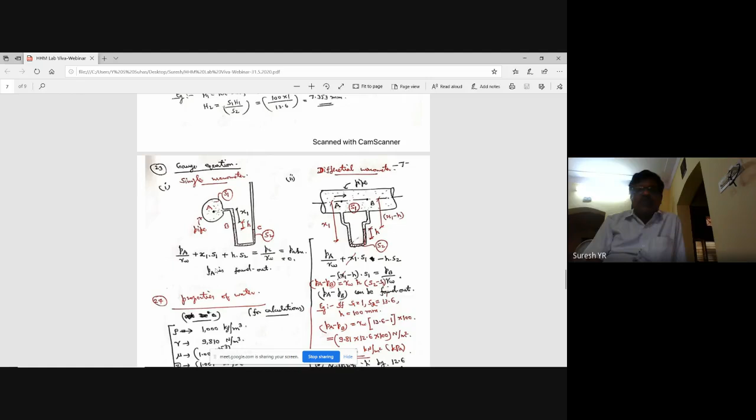Then you have here this differential manometer. If you want to measure the pressure difference between 2 points, this is what you are using in the case of Venturi meter experiment. Okay. And in the case of turbine also, you will be using this. So whenever you are using, this is the U-tube differential manometer, there will be 2 limbs.

So let us take A and B at these 2 points. I want to measure the pressure difference between these 2 points. So tapping is done to these 2 points. Limbs are connected to these 2 points. I have to start from point A. I have to move towards point B. To start from point A, PA is the pressure at A, PA by gamma W. So this is in terms of water we are writing.

This is how we get this. All those things, don't worry about that, because it requires the conversion of pressure from one liquid to another liquid, all those concepts. But I am only giving you how to write the gauge equation, easy method. If you want to refer the theory behind this, you can refer the textbook.

Plus here, once again, from here to here, I will take it as X1. This point you can take it as C, this you can take it as D. From here to here, X1 is the distance and S1 is the specific gravity of fluid flowing in this pipe, let us say. So X1 into S1. Then here see h. Next point is this point D, CD. Distance between these two is small h. But this point is above this, that's why I have taken negative.

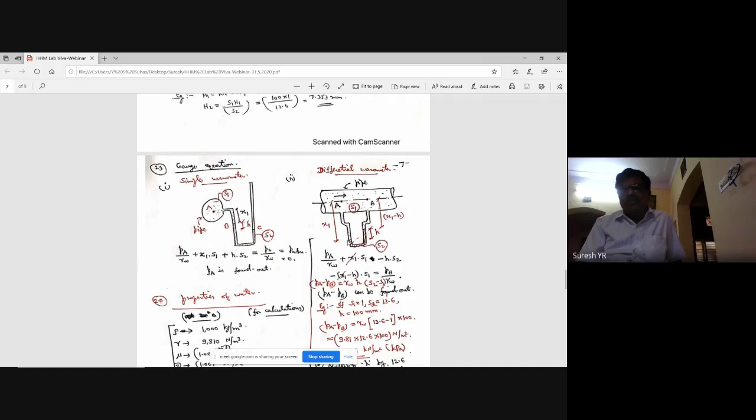Now everything you know except PA and PB. You know all the values, specific gravity value you will be knowing. If you know the distances, everything you can measure using scale. In the laboratory, the setup is there. I have taken example here, water and mercury, h is equal to 100 mm. If you substitute in this, you can make out the pressure difference. You are getting 123.6 kilonewton per meter square or kilopascal. That is the reading.

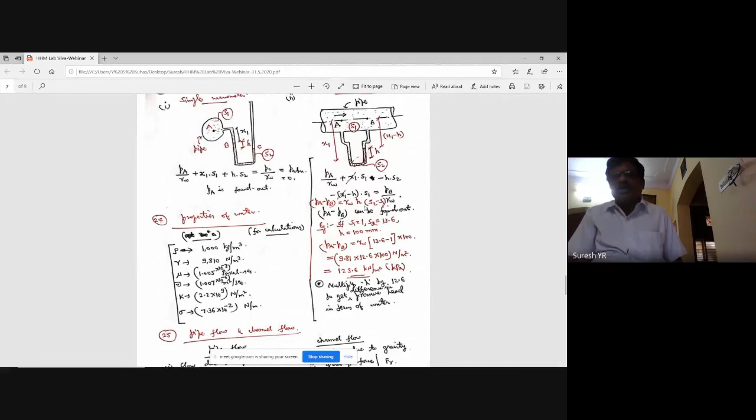So I have given one hint here. Multiply whatever value of h you are going to get here in terms of mercury. The small h will be the difference in the mercury levels in the manometer. You multiply this by 12.6 to get the difference in pressure head in terms of water, because that Sm by S minus 1 equation is there that I have explained earlier. So Sm by S minus 1 gives 12.6 there. So don't multiply by 13.6.

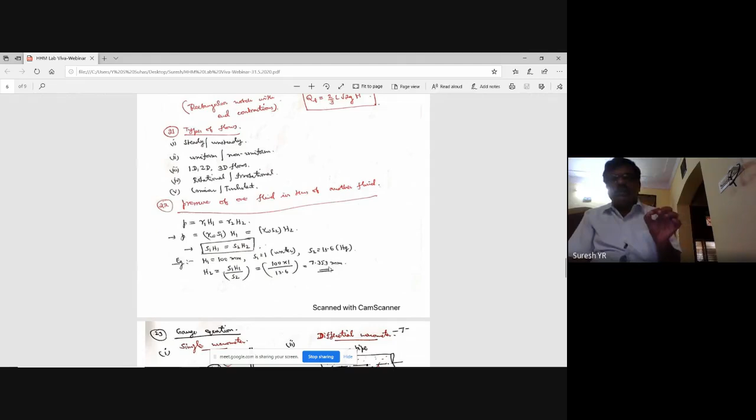13.6 you multiply when you are converting pressure of one liquid in terms of another liquid, pressure at a point. Please note that here. Very, very important. Students do mistake here. If you are converting pressure difference between 2 points from mercury to water, you have to multiply by 12.6, not 13.6. You can see this equation I have derived.

Okay, so this is what I wanted to explain you today. Lot of things are there. There is no limit for the data, so I have to myself make an end. Some 25 questions, I think most of the experiments are covered. I have discussed, I explained. Some of you might have noted down. I will be very happy if you have noted down, because some of the concepts, if you start reading, it will take a lot of time. So that's why Dr. Vishwanath sir has taken this initiation.